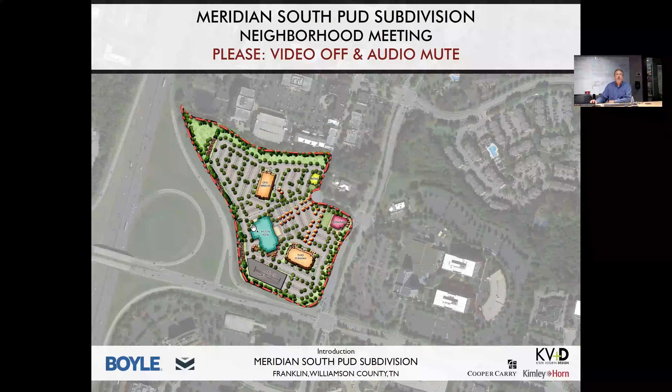This is about the Meridian campus in Cool Springs. We're looking at this portion of Meridian - the property in the red line, south of the existing Meridian campus with Tupelo Honey along Carothers Parkway, a mix of office, retail, and restaurants. On this side of the campus, there exist today two office buildings, Office 1 and 2 Meridian, and the Hilton Hotel in the middle, with structured parking surrounded by surface parking. We are coming to the city to request a couple things.

One is we'd like to add 14,000 square feet of retail commercial use with ancillary amenities as part of this package. We're also asking for a parking reduction as part of this project, as well as modifications for standards of signage and wayfinding.

Meridian has been very successful as a mixed-use project. We really just want to invest in this and make it more positive, add more signage, add more retail and mixed-use components, and bring this into a zoning change, because currently this is zoned as regional commerce, 12-story. We are rezoning this to PD Plan District only because we are asking for modification of standards for parking reduction and signage, which kicks us into a PD rezoning effort that requires this meeting.

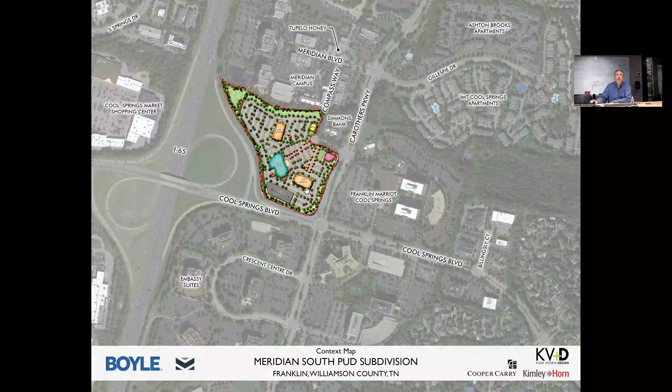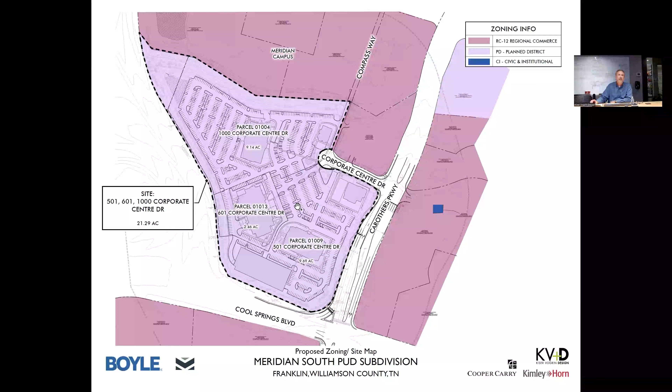This is the current zoning of the project. As I mentioned, we are along Corporate Centre Drive, Carothers Parkway, and Cool Springs Boulevard, and I-65 to the west. We are zoned RC12 commercial, which is basically everything in this area. We are asking to be rezoned to PD Plan District, which allows for a mix of uses and these modifications of standards for signage and parking.

Back to the site plan - we'd like to bring in a 10,000 square foot retail restaurant at the corner of Corporate Centre Drive and Carothers Parkway, pushed up to the street, displacing some parking, adding amenities and structure. Then at the terminus of Corporate Centre Drive, add another 4,000 square foot building. Both are one-story buildings with ancillary amenities, really just trying to activate the campus in addition to what it already holds, building on that success.

You can see the existing Meridian office buildings in brown and the hotel and existing parking deck, just adding this 14,000 square feet of commercial space. Zooming in closer, we're along Carothers Parkway here, Corporate Centre Drive. There's an existing Simmons Bank, which is off the property, not part of this development - I just want to show context.

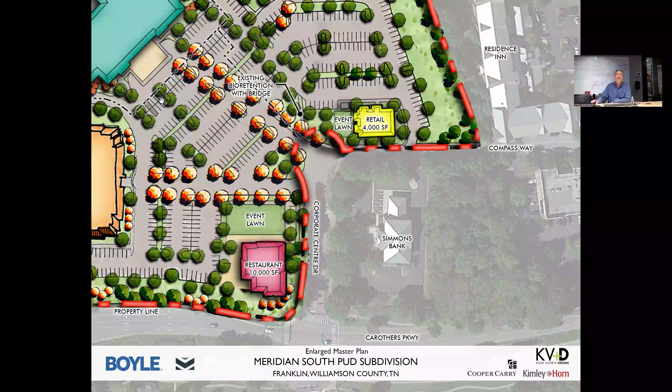The amenity event lawns and outdoor space bring activity to these uses as part of the construction of these projects, with the surrounding hotel and office adjacent to that.

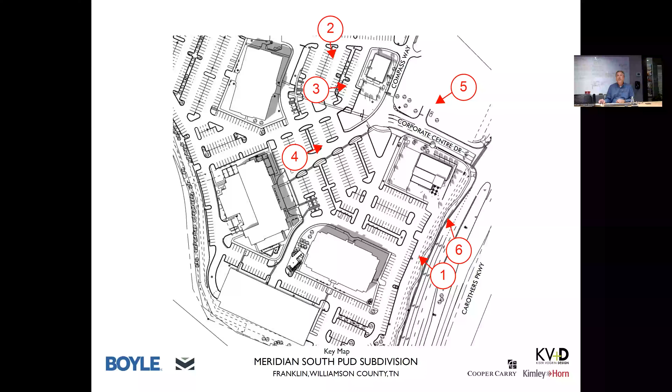Next I'll show you how this sits in 3D, since plans are sometimes tough to understand in plan view. We want to show snapshots of how this building configuration works along the streetscape and existing buildings - the two buildings along Compass Way and Corporate Centre Drive, the 10,000 square foot building here, 4,000 here, existing office and hotel here. These are bird's eye views of how the buildings are located on the site.

Again, the 10,000 square foot restaurant has outdoor open space, seating, chairs, and an event lawn to animate that space along Corporate Centre Drive. The second building is the 4,000 square foot building at the terminus of Compass Way and Corporate Centre Drive with outdoor amenity, with the office and hotel existing adjacent to the site. The unique opportunity here is to bring amenities to these buildings.

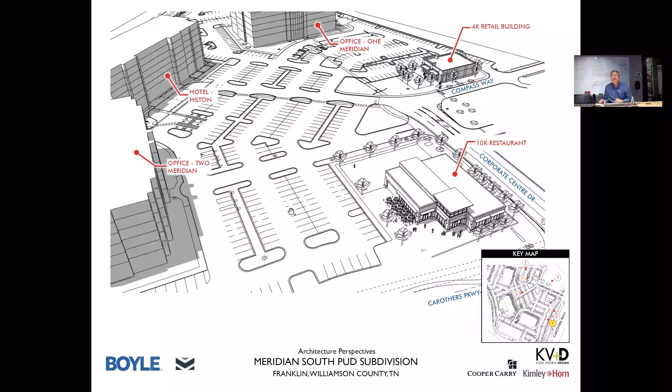All the retail and restaurant is in the Meridian campus, solid in terms of the north. Bringing these uses closer to these office buildings animates the space and allows walkability between both campuses and the mixed use elements. Just another snapshot, looking in the other direction.

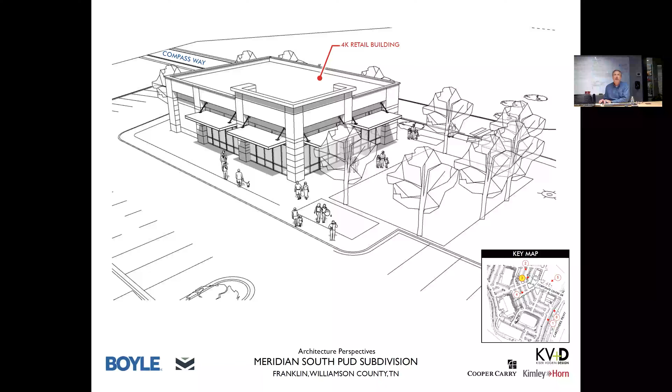Corporate Center here and Carothers Parkway to the top of the page, two buildings, one story in the space. A zoom in of the 4,000 square foot building. Here again, we are showing just conceptual architecture at this time. As we move into future stages, working with planning staff, the Alderman and Planning Commission, we'll show more detailed architecture, but this shows kind of the massing and scale we're denoting here, moving through this project.

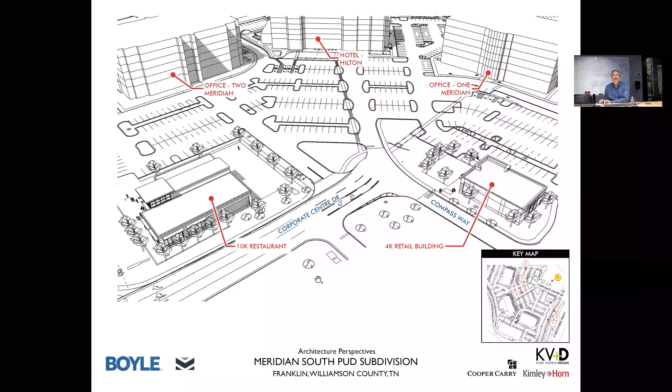Just another animated view of the building types and locations, and the overall campus opportunity here. The 10,000 square foot restaurant building, and then the 4K building in the background along Corporate Centre Drive and Carothers Parkway.

So as I mentioned, we have modification of standards, one of them being signage. Signage in the city of Franklin is prescribed by the zoning ordinance, and there's certain things you can and can't do in terms of size, height, scale, massing, logos. We would like to bring something unique in terms of branding, wayfinding, just an experience to the campus, give it that identity. We see this in many successful communities throughout the Southeast and elsewhere.

Just animate the streetscape, provide opportunities for lighting, signage, fountains, just animation of the canvas and rebranding of the project itself. So we have to ask the Planning Commission and Mayor and Board of Aldermen to review these standards and either accept or deny these options as we present them. This is just something that's part of the package as well, just ideas and concepts. We'll be refining these and work with the city staff to move forward on this as well.

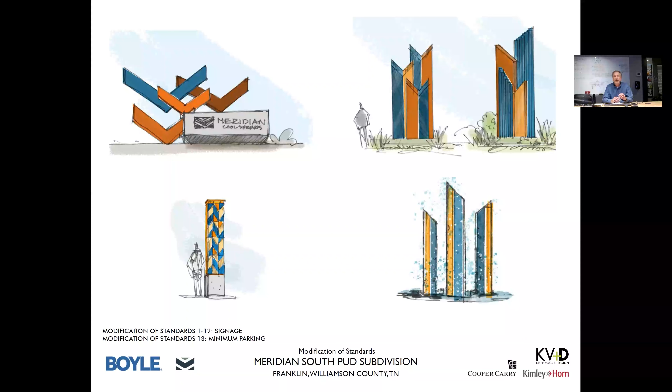I don't have a plan for it, but the second modification of standards stated at the bottom of this page is for parking. We are asking for a reduction of parking. The benefit of a mixed use project is we have so much parking for these two office buildings. We have so much parking available for these two uses, 4,000 square foot and 10,000, that we have more than ample parking spaces here, given this was overparked in the past. The standards were very high at the time for parking demands for office and mixed office.

But having mixed uses for retail, restaurants, hotel, and office, the shared parking spaces work tremendously. So we're amply parked for these uses, and we have studies to back that up that have to be submitted to the city of Franklin as well. So we have the traffic impact study that was also provided, shared parking analysis, in addition to the signage modification of standards. All those elements are being reviewed by the city as well.

Speaking of review, this is kind of the process we have to go through. We have to hold the neighborhood meeting, which is tonight. We are going to go before a joint conceptual workshop with planning commissioners, mayor and board of aldermen, to get their feedback on all the things presented here in terms of building placement, signage, parking, traffic. Get some feedback from them on the 14th, then go to the planning commission on January 25th of '24. We are hopefully obtaining approval of recommendation from them to move on to the mayor and board of aldermen, who then vote on this as well.

So there are many public meetings being held in addition to this one, if you so decide to attend. The mayor and board would be the final vote on all conditions of approval for modifications, as well as site plan, parking, and traffic.

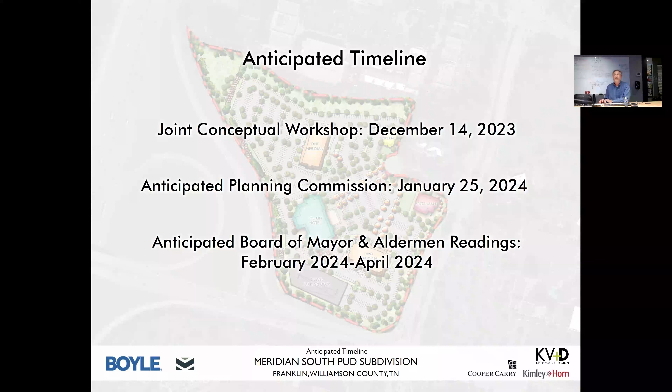That concludes my presentation about this project, and I'll open the floor. I think Phil is on the call, and Chelsea is the only other person on the call. I'll allow you to speak, Phil, if you have any questions about what we talked about.

Phil, are you there? You have any questions? Just want to check. I'm here, you did fine. I was just curious what was going on. You did, thank you very much. Oh yeah, no, appreciate your time. Thank you, so you were good? Yep.